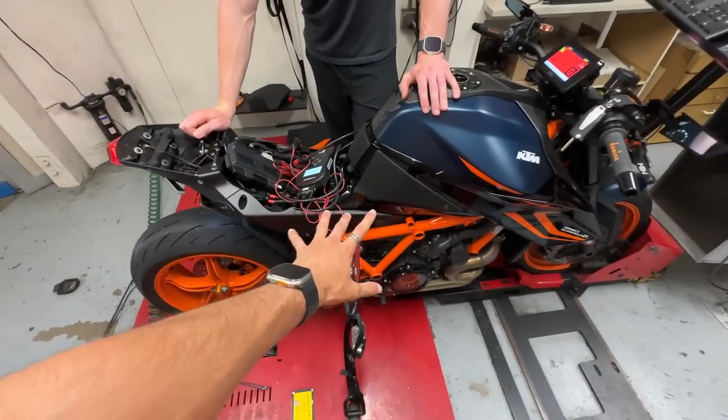It's Troy from Brent Tuning, you guys already know that. It's a little bit backwards because we kind of filmed the first run first, and then I was like, oh, I didn't film an intro. So now we're filming the intro, but we already did the first run and everything. Now he's tuning it, putting on the map, and we're gonna do a few more runs to see the difference. We kind of did everything backwards because he already did the tune and did one run and saw the number. Then when I came here, he did kind of like the stock run, and I was like, oh, I need to film the intro. We're literally doing everything in reverse, but we're doing it back again. You guys are gonna see it properly: the intro and the first run, and then finally, like now, we're doing the retune and checking out the numbers after the tune and the curves and all that fun stuff.

So, all right, stay tuned. Well, tuned, yeah. All right, here we go.

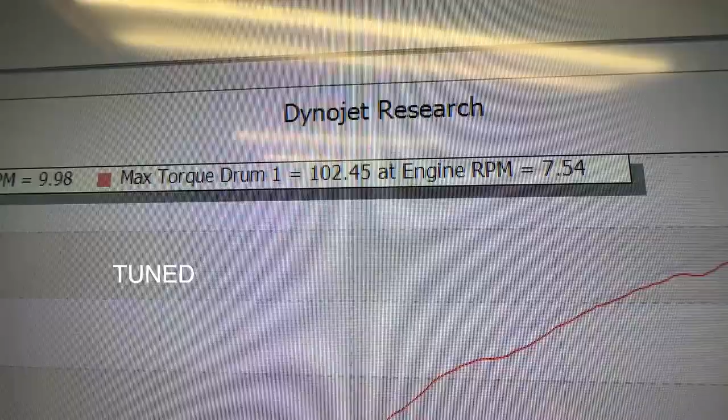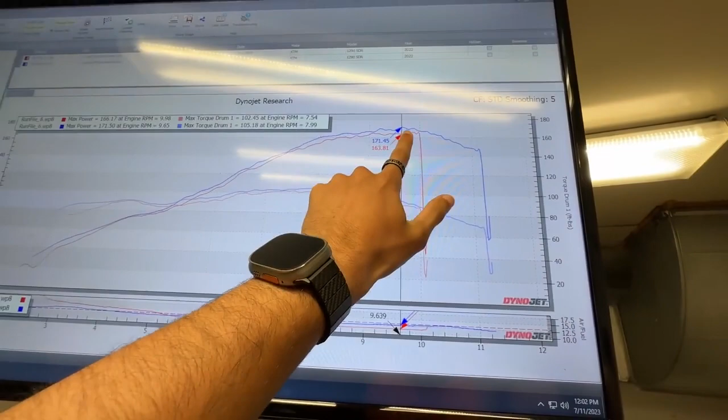This right here is stock, and this is tuned. Stock is right, how much more it revs higher? So how much does it rev to now? 1,000 more RPM. Okay, that's really good because it was really bothering me how low it revs. So now it goes up to 11, a little past 11, let's say 11. It went from 10 to 11 pretty much.

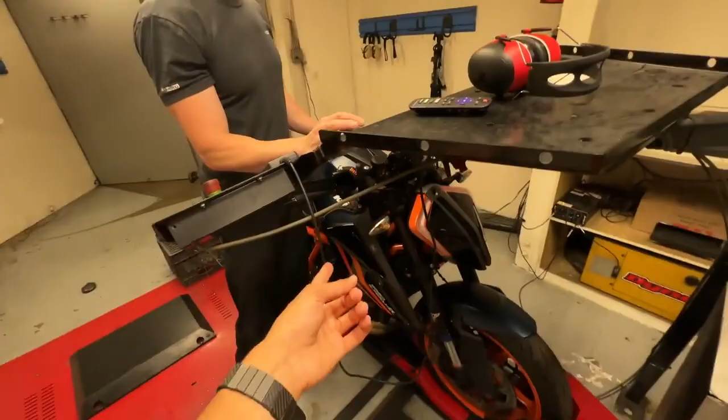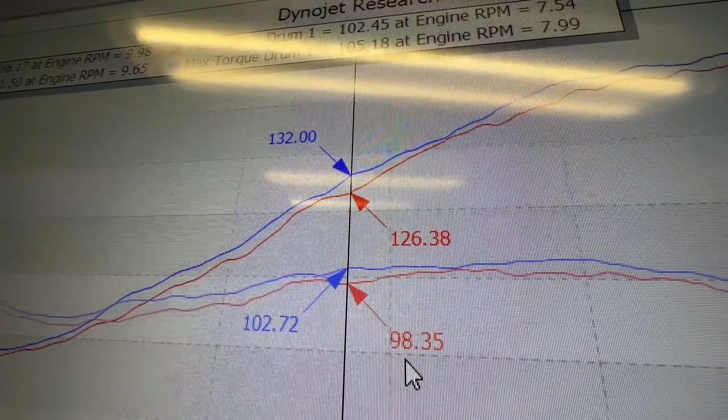And you can see we've got gains across the entire range here, not just... pretty much with just a slip-on, because I don't have a filter or anything on it, we gained 5 horsepower. Look at peak here, we're gaining almost 8 wheel horsepower right there. So that's a good gain right there. Let's just say in the mid-range, well not the mid-range, but 5 right there, and we're getting torque, 4 extra torque. On bikes this is huge. Right here, for example, that's 6 wheel horsepower in the mid-range, and it's 4 wheel torque in the mid-range.

Even right here, red is going to be stock. So right around this, well they're all right around the same number, but you can see we're getting about 6 wheel right there, torque and horsepower. So it's gains across the entire range plus the obvious RPM gain right there. We're also getting less shifts on the track, extended power band, stuff like that. We also made it safe. It's a little bit rich right here, other than that this thing's rocking right now. So it's good, we're gonna do some power runs real quick.

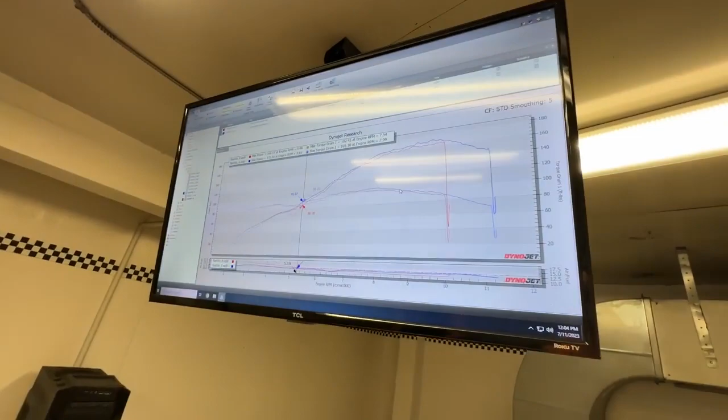It's kind of impressive, like the stock curve. That's pretty decent, right? Yeah, especially when you compare it to other twins, like the Ducati 1299 or the 1199, which was a complete disaster in the mid-range and bottom end. It just turned on like a 2-stroke up top. This bike's nice and linear stock, yeah, it's great.

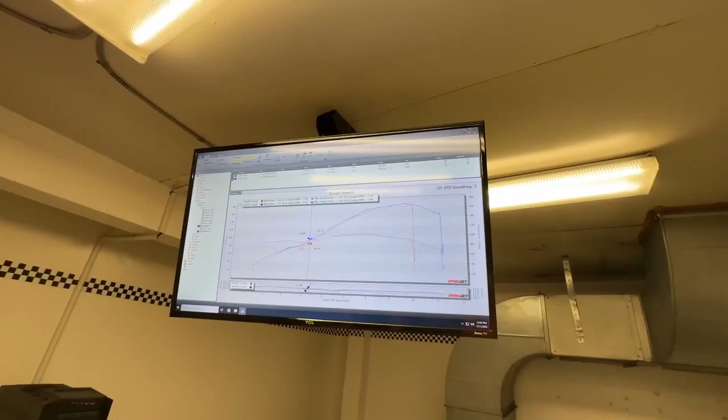That's what I was looking at. I was like, the curve looks pretty decent. It looks very good. So yeah, that's stock and it doesn't look bad. Very good, there's no dead spots. KTM, you did well with this. And no dead spots, expect nothing less.

One thing I did learn though is when we're putting the sniffer in here to actually get the AFR, the air fuel ratio, you've got the exhaust valve in here, right? Yes, but I wanted to test it stock with the exhaust valve functioning, and I shoved the sniffer through there. The exhaust valve, I slipped it under and turned it on, and it creates an error where the bike goes into limp mode if it doesn't fully close and open properly, like it doesn't cycle correctly. So I had to fix that.

Kind of makes sense. Apparently these are very touchy, temperamental and everything. Yeah, if you put any kind of mapping in here, usually the turn signals will stop working, the lights will stop working altogether, if it's like a race map or anything like that. That's how they go through the EPA and whatever conditions they have to go through here.

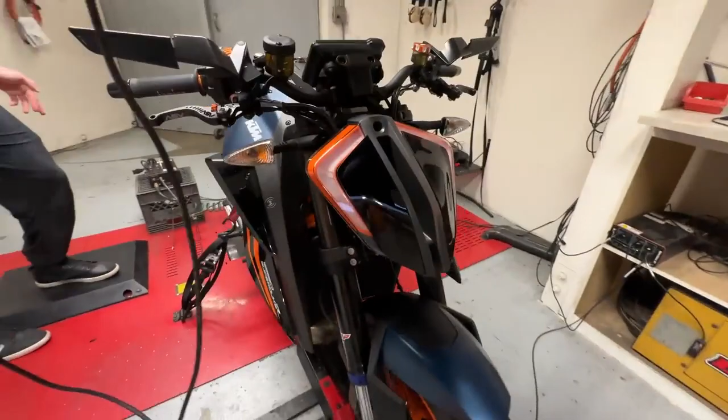I know, I've heard they have a lot of touchy, sensitive subjects. What about the turn signals? Are we able to get them off? We can get them, I just haven't had time to do that. Okay, because I need those gone. I know, you don't like them. They're so ugly, it's just so odd. There's no way to actually remove them unless you just cut them out of here.

Yeah, and apparently that throws the bike into a limp mode too, right? It becomes a disaster, imagine that, it's so complicated. So apparently there needs to be a little servo buddy or something like that. Yeah, there's a whole system you put in here to remove the turn signals altogether if you want to. It's a couple things you kind of have to do, electronic stuff. It isn't just plug and play for this one. It's a little bit more complex. This is why I have plug and play, the professionals deal with it.

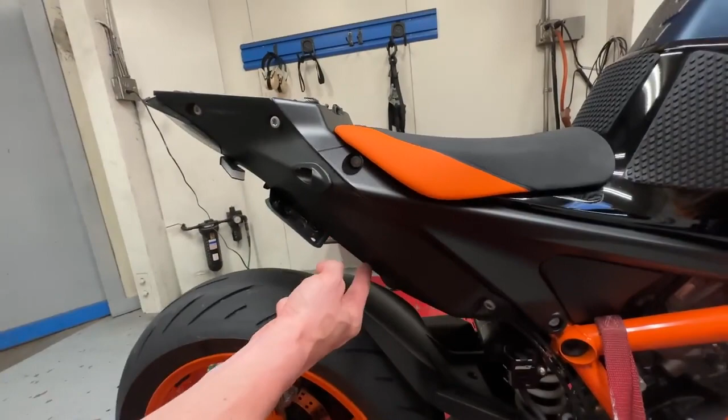The exhaust valve is plug and play though. So for the exhaust valve, you have to pull the entire bottom off of this bike. The exhaust valve, you can see the lines go through here, it sits right here. So to plug it in, you have to get under the thing, which is right here. You can't get it from the top. You have to pull all these Torx bolts out, the tail comes off this thing, and then you have to put it in there.

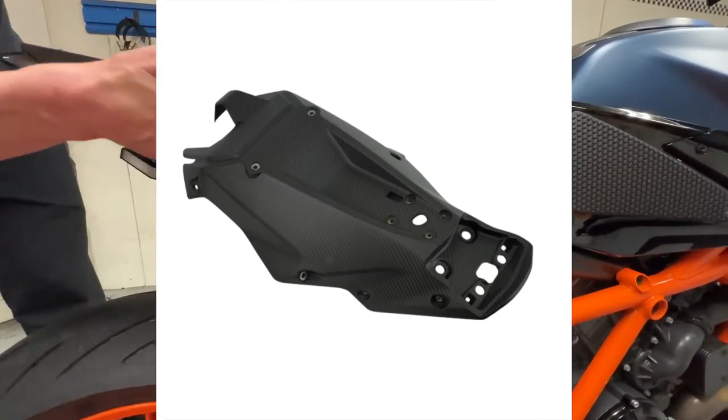I wonder if that tail is replaceable, because I saw there's some carbon fiber. It has to be, I don't know why it has such robust covers and stuff in here. I don't know if maybe this secures the subframe, the carbon undertail. I don't really know, or maybe the carbon undertail goes on top of it. I would assume it's a replacement though. It is some kind of composite for sure, so it needs to be sturdy, but I don't know if this is actually securing the subframe, to be honest with you. But it looks like the subframe's through here.

So now, with the subframe separate, what we just ran it with was the stock tune, and we're gonna run it again with the tune. Yeah, I'm gonna tune it back again because I did it backwards. I kind of did all the tuning first, and I ran stock just now when you showed up. So that was the first run, I made it stock, and there it is right there. And now we're gonna put the flash back into it and have some fun.

You'll be able to tell the difference now between stock versus flash because you've heard it stock now, and you're gonna hear it flash. It takes about 15 minutes to flash this thing, so we'll be right back. Sounds good, yeah, we're gonna flash it and then do some runs.

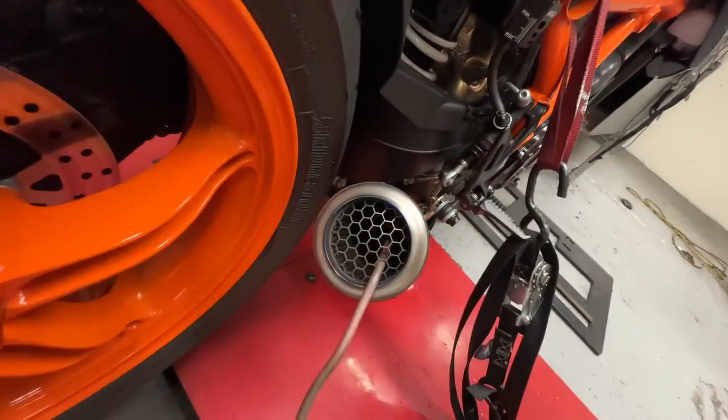With the tune, it's gonna keep the valve open, right? Yes, in fact you can actually shine a light in there and see the valve's just wide open at a 90-degree angle to the exhaust itself. It's perfectly open, the air will go right through it. It'll always be like that though, always gonna be open. That's what I wanted. It's already very quiet because we didn't get the custom exhaust on it yet.

Hopefully one day. The problem is if I do that, it'll probably need a retune, right? We'll probably have to throw it back in the dyno again. Not a big deal.

So in the future when I get a custom exhaust for it, that means the Rush. Oh yeah, I need to bring the Rush at some point because I did make a custom exhaust for it. Now the Rush is completely decatted. Especially with custom exhaust, we can't really use a model for it, that's the problem. So it has to be kind of like dyno, we have to kind of check it out because it's custom exhaust.

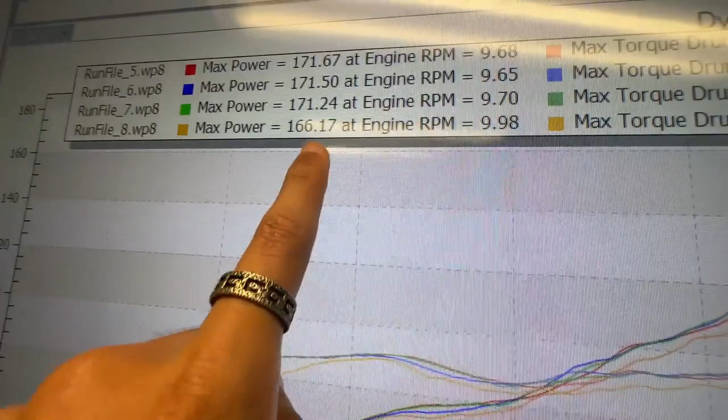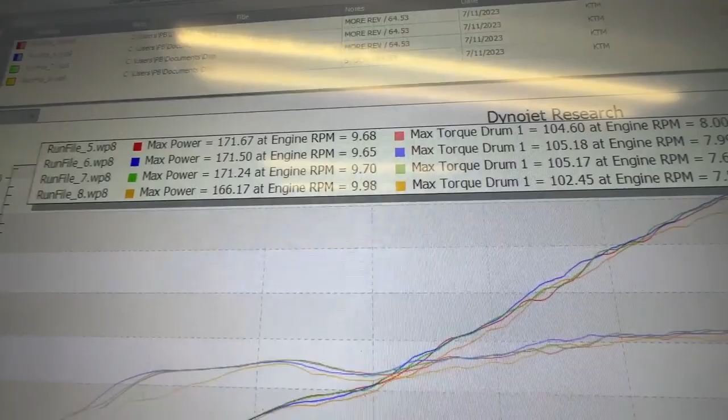Stock, then all the other runs that we've done with the bike. Right here, better now. Now we can hear, we're getting hot in here, but yeah, all done, tuned. I mean, it sounds very different, it looks way more aggressive than the stock, and most importantly, that it revs higher. I think that's gonna be really nice.

Tuning the power band is really important. A lot of people also had a complaint, which we address with the tuning, which is taking off the minimum cruise control speed. So we pulled that off too, so the exhaust valve's wide open 100% of the time. Extended rev range, of course, to mean bigger power band, less shifts at the track. There's torque optimization, there's timing optimization, there's a whole lot of switches we kind of mess with on here.

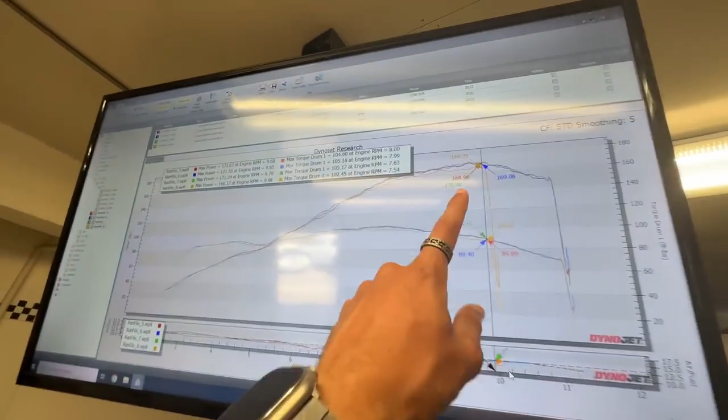And it kind of equates to about 5 horsepower across the entire RPM band until the top, and even at the top it starts carrying away from stock. So the bottom curve was stock and all the top ones are the other runs with the tune. As he was saying, the difference isn't just in the peak, but literally the whole curve. Everything was improved, and mainly you can see the difference with the new RPM being pushed to 11,000 instead of 10. So now she's all done. Stay tuned for the first ride review of this thing.

I did get a lot of parts for it that are finally getting shipped here. They're in stock, got delivered to the dealership, and the dealership is sending it to me. So we're getting this piece in carbon, this in carbon, and a bunch of other touch-ups.

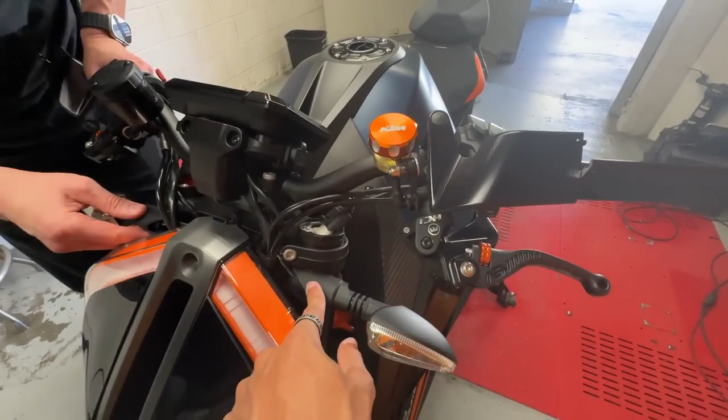When I get it back from Troy, it'll finally have the ugly Shrek thingies removed, which we can destroy or do whatever. Usually I just smash these. You get rid of that, but I don't like the way it looks getting rid of it. You've got some kind of block off right here on this section. I'll remove the whole thing, even that, and this too. Yeah, the whole thing will come off. Everything is gonna be gone, so it looks clean and a lot better.

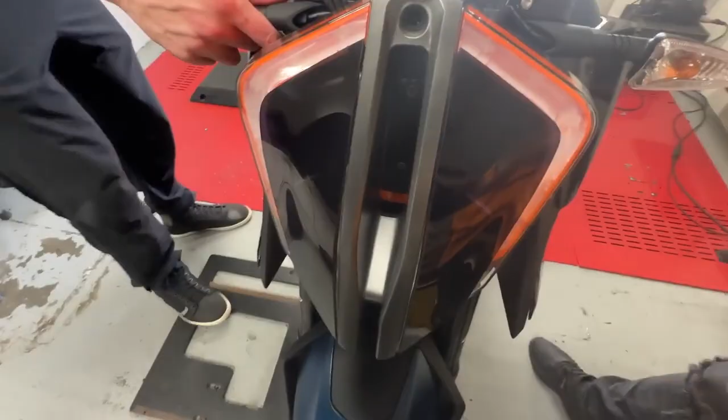I also got these little tints that I don't know if you guys saw last time, plus a bunch of other little details and touch-ups. Then this bike should be almost complete.

Ideally, at some point I want to get that decatted exhaust. This was already very, very loud, already crazy loud, but I feel like that cat resonator piece back here is massive, so removing it would 100% clean it up, plus extra horsepower and stuff like that.

I do need to get the pack or something like that, some package to unlock the quick shifter and all that fun stuff, if I decide to do it. Sometimes I'm in between about it, because since I switched to the GP shift, the auto blipper doesn't work anymore, so I kind of shift manually. I'm like, keep the naked bike's manual shift, not that big of a deal. They don't have really heavy clutches like the H2 or some of my other bikes, so this is super easy. A little squeaky, but some WD-40 will fix it.